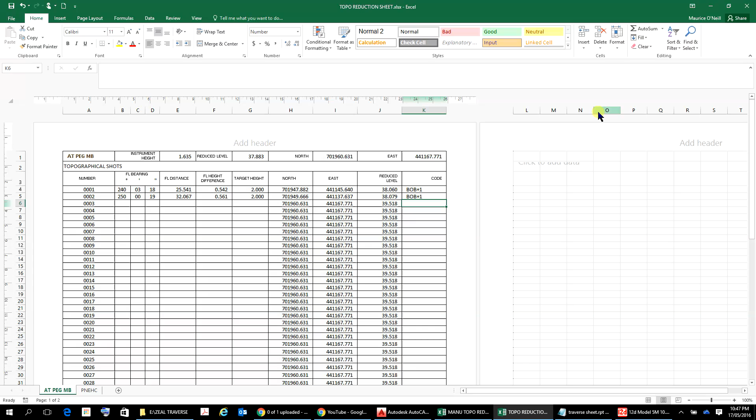So what I'm going to do now is bring in this one. I have completed this, and there is the completed version of it. When I've got everything in, I deleted all the rows below it, and that's all of the data input. And you can see there's BOB, TOB, and that.

We can print out a copy of this for reporting purposes, and we can do various variations, maybe leave out the field information and just have the point numbers, coordinates, and height. And in fact, to import this into 12D, I've created over here a simple CSV file. So this is all of the data in the point, northing, easting, height, and code format, and that's ready for input into 12D.

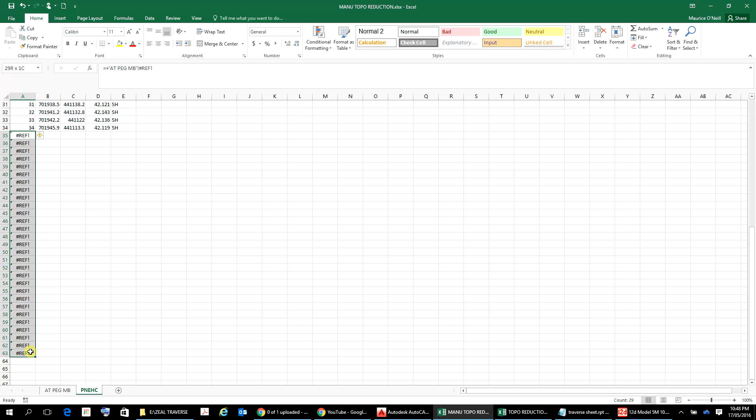And I just get rid of these rows here and just delete rows. So what we want to do now is to save that information there to a file. I've got that sheet there open, and we just go File, Save As, and we browse to where we want it, which is the Zeal Traverse there, and I've called it the Manu for manufactured topo

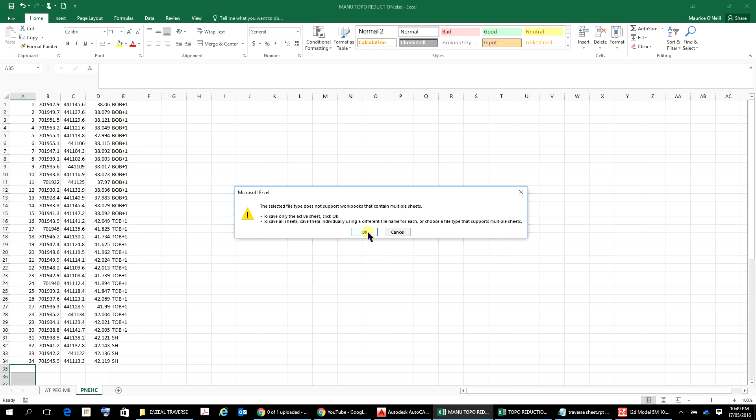reduction.xlsx, but we actually want it to be a CSV file, so I've chosen that one there, Manu topo reduction CSV, and you can see that I've already got one there already, but just go save, and do you want to replace it? Yes. And then it comes up with these various things here. The selected file type does not support workbooks. That's okay, that's fine, and yes, that's all good.

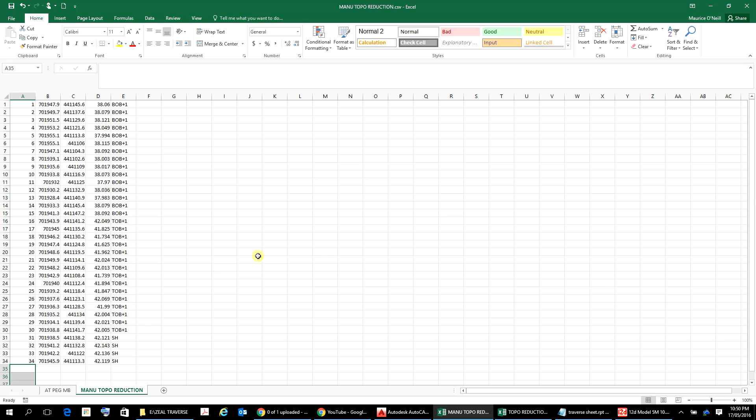And you can see that it's actually changed the name of the sheet down there to the file name. So that's all booked up there. That's pretty much it. Getting the topo data all collated, and we've got the coordinates and the heights and everything done there. Hopefully I've got it.

I was just a little bit concerned in there that I had plus minus. I wonder if I could possibly take that out of there, and let's just see. Let's just go escape there. 38060. I can take that out of there, and it should remain the same. So that's, oh no, it doesn't want me to do that. So yeah, so that's it all there, and what have you.

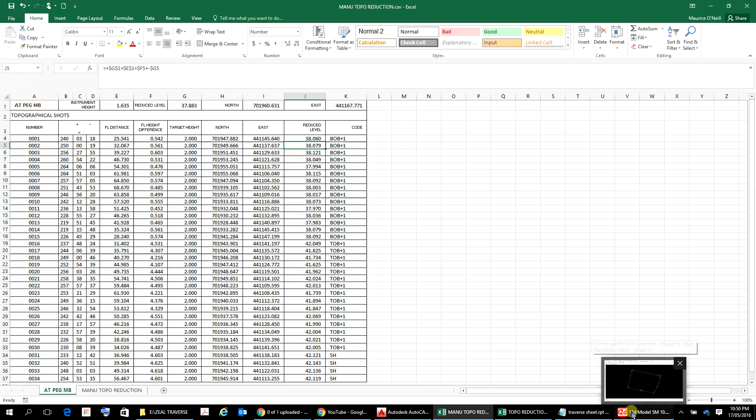So now what we do then is we want to import that information into 12D, which I've got here all set up in 12D. Now, one of the things that we need to do before we import the information into 12D is to set up what we call a map file, and this is here the map file.

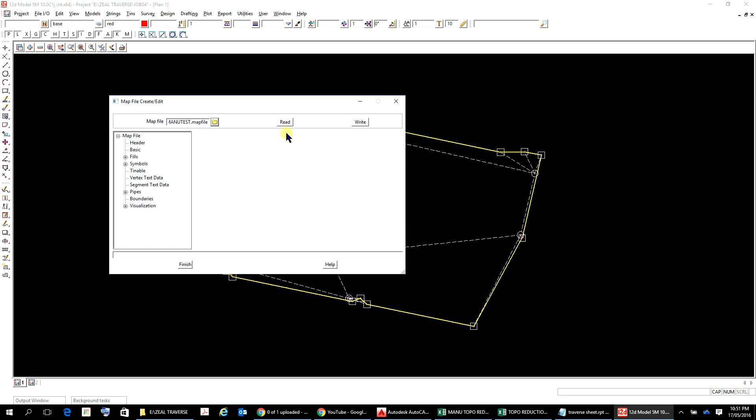We set them up. Now, it's probably best to just find the map file first, and that's the Manu test map file there, which I think is the one I did. So we just click on that and we go read, and that reads the map file in there, and then we can just have a look at the basic.

And what we've got there is these are the various codes. Now the ones that I have used are spot, height, Tob, and Bob, and you'll see that I've got the little asterisk there, so that the strings where we've got the +1, that will join all the +1 strings together, and if we had +2 strings it would join all those together, and +3 and so on. So that's to cater for the pluses there, where we've got different strings for different bottoms of different banks.

So we're going to have a top of bank 1, and the thing is that we've got the strings, so the strings will do a continuous line. With the spot heights we've just got a single point, so they won't string together, they'll just come in and show up as a point. And this here is the name of them, which I've kept the same, and this is the model or the layer that they go in.

So the spot heights will go into a spot height layer, the bobs will go into the bottom of the bank, and the tobs into the top of the bank. And then I've got other ones, edge of concrete base and other ones. And these are a map file, and you can build them up as you go and add various codes and get them all working, various colours and things like that.

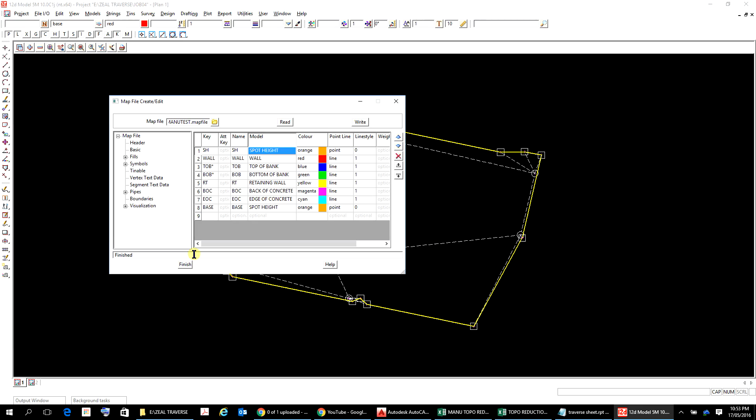It's just that basic one that you need at this point, and I think that's all you need to know. So we'll just finish there with that anyway. And now let's see if we can import the CSV file that I've created from the topo data. Just be aware that this data is not real data, it's manufactured data that I've made up.

So we go to File, Input, Output, and we want to go to Data Input, and we want to go to the XYZ format, and possibly that one there is the one to use. And the file to read is manufactured, that one there, and that's our topo data there. The basic default line color, the yellow, I prefer red really. There, the default text style, you do need to nominate that. Skip column headers, default model for data.

We'll just call it topo default, and add to the view. Well, we'll just add it to view 1 there, like that. So the format of the file that we're going to use is going to be X is in 3, Y is in 2, Z is in 4, the name will be in 5, and the point ID will be in 1.

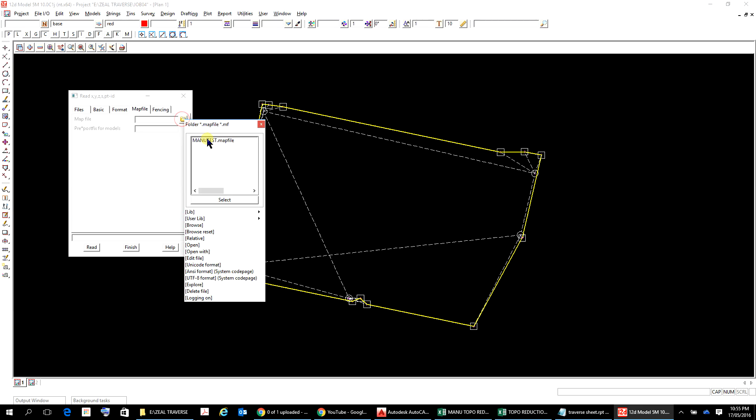The delimiter will be a comma, and we've got the map file all set up, which is that one there, and we'll go to the file and we'll just go read and finish, and there is our little file there. It's created a new plan form there, but are you sure you want to close this view? Yes. We'll just go into here, make this big, and I'll just turn the models on, bottom of the bank.

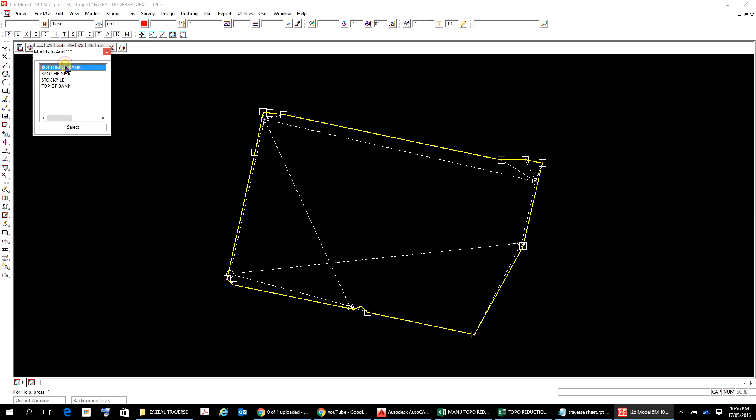So turn that on. Top of the bank, right there, and spot heights. So that's turned on all our data, and it's in. You'll notice that these strings are not closed, so that's just a matter of going Strings, Edit, Close, and start, and it says finish the selection.

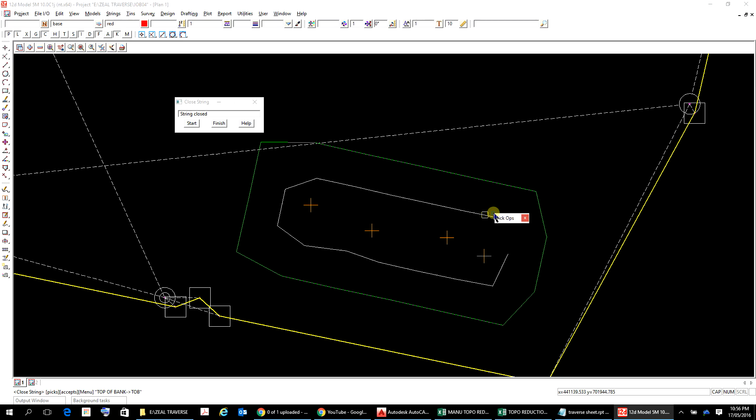Now in this thing you can select and then right click to accept, okay, and click and then right click to accept. You can also click with direction, which comes up as well. So there's our stockpile there all shown, with our top of bank in blue, bottom of bank in green, and our 4 spot heights.

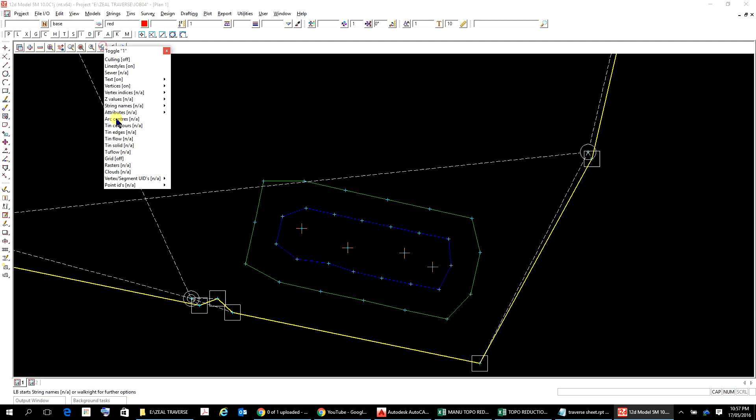We can go to the tick cross here and turn on the vertices, and that shows us all our marks. We can turn on our Z values, which is the heights, so that's giving us the heights of all of the marks there that we've keyed in, and also we can turn on our string names, yes, and we can turn on our point IDs as well, so that if we want to go in and edit anything or have a look at how things are going.

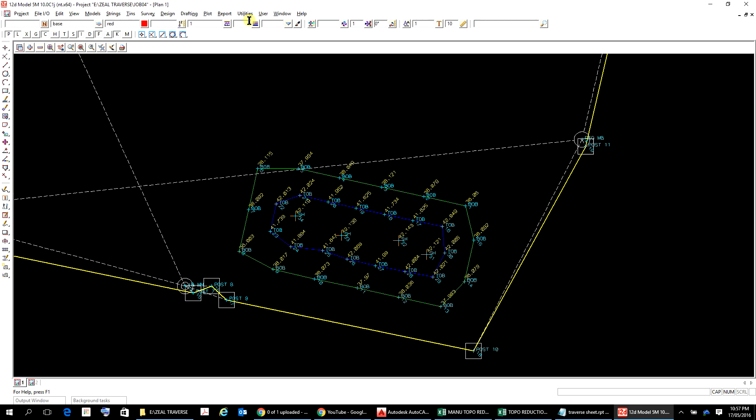We can also, if we want to, go to a view here, and we can look at a new view, and we could look at a perspective OpenGL view there like that, and just come in here. Let's turn everything on, bottom of bank. Just hold down the control key to select multiple models, stockpile, top of bank, like so, select, and hopefully this is coming in.

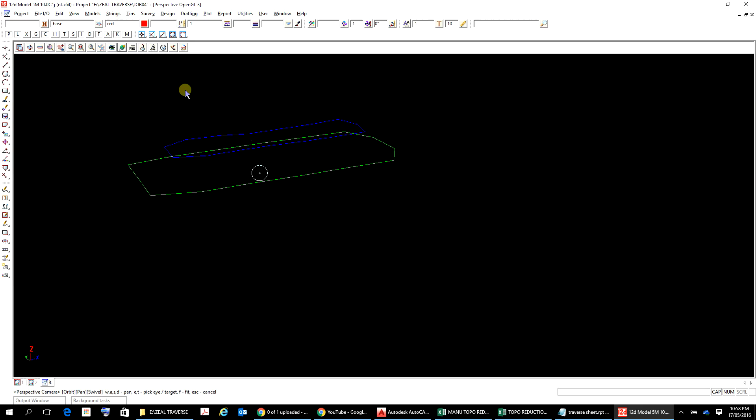Where's our, oh, there it is, and we can just see there that if we grab our little toggle, there's our little stockpile there. We can see that's in 3D. We can see the bottom of the bank, the top of the bank, and the spot heights, and it's a bit of a 3D sort of thing going on there. Well, that's about as much as we can do at this stage.

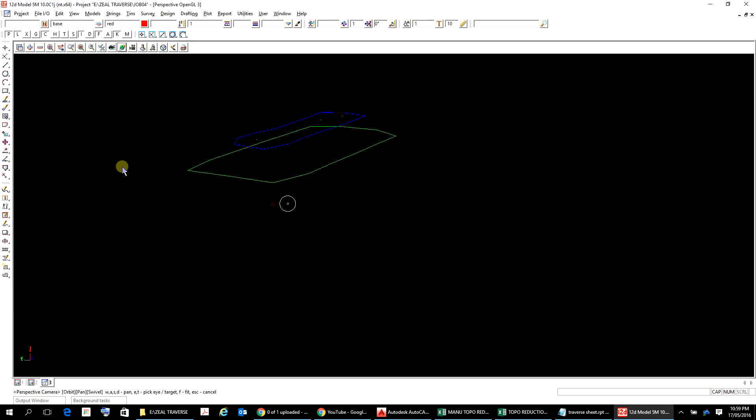We can look through, and as you can see, that's just a very simple little stockpile that I've put in. We can go back to just our standard view there, and that's it in like so. And as I mentioned earlier, we're also able to get a listing back out of this using CSV file functionality. So that's got our topo points into 12D and sort of drawn up in a bit of a diagram.

So you could use various screenshots, I guess, to show that, but very soon in a video I'll possibly show how we could plot this out as a bit of a plan that we could use.